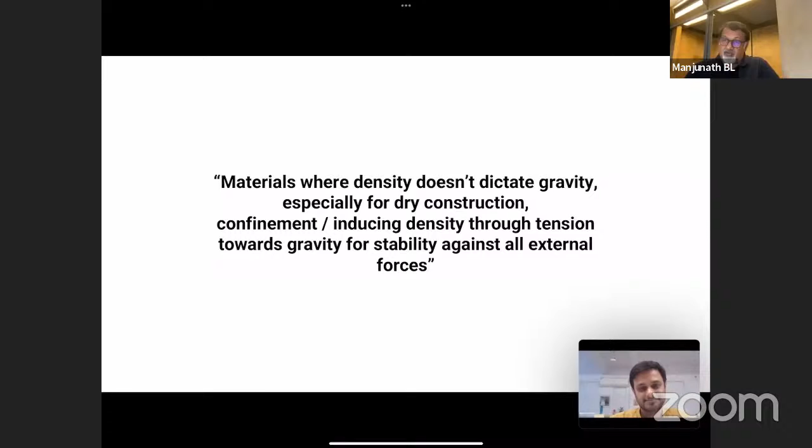So I just skip this, and go to this very overall picture. This is very interesting to me. I think what I start looking at, in a way, when I am at my scale, I can see objects, but when I go beyond my scale, I see two lines which are very provoking to me, very scary to me.

Is the horizontal line between the earth and the sky - that is where we are, right? And then there is a very scary line, the vertical line, which is between the water and the land. Just look at people - they're not bothered what is below the water. Imagine for a moment, on the edge of the land, if you just imagine there is no water, you're on top of the mountain. Immediately you're on top of the mountain.

Similarly, on the horizontal surface, you are at a great level of influence of external forces onto the ground. Either the wind wants to take over the ground, or the ground has to intrude and take away the sky, the space. Similarly between the water and the land.

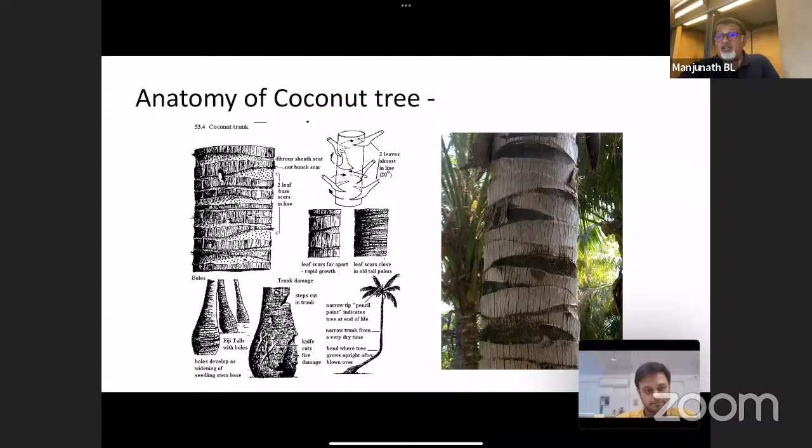So go back to the next, my very interesting interest in nature is a coconut tree. This existence is between the land and water. The first wind will come and hit the coconut tree. So what is this coconut tree made up of? If you observe the coconut tree, the way it sheds the leaf, the surface, the texture of the surface, as you can see. And if you look at the cross section of the coconut tree, you look at the coconut, you have porous material in the center and very hard strata on the periphery.

You look at this, and to me, this is a fantastic example of concentric springs. This is nothing but how I perceive this, I see this as a spring. If you look at this image, I look at this as concentric springs, which are seamless, and every moment it is strutted by a compression member so that it doesn't come back. So it is pre-stressed and confined. And you look at the cross section of it, it looks like a star. It's fantastic. All these struts are nothing but triangular formations which strut the spring and keep it so rigid.

And still so flexible. So that's why I tell most engineers, luckily this tree is not designed by an engineer. If this were to be designed by an engineer, I think there would be no existence of any coconut tree, because this tree has the ability to flex and come back. It doesn't hold this force. It allows the force to relieve itself and then come back, because of the effect of the spring.

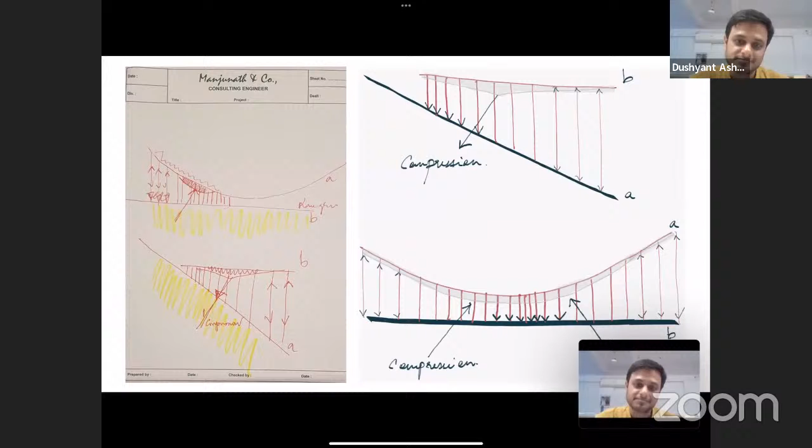Kailash temple is one, and the second thing is this in Jaipur — you have this Hawa Mahal. I was just talking to an architect, Flying Elephant Rajesh. We were just talking about how one shape, one size of different scales has put together to create an environment which is totally different, magical.

Each element of different shapes are put together. The inspiration came from carving, because everything is very thin, but the scales are different—one small, one big, one higher—and people move within that, to experience the movement of wind, which is fantastic.

How do people get this idea, and why are people not getting this idea? It's a question, basically.

So do you want to also build up from other things that you have for us today to show, because I think there might be other interesting things which open up from this.

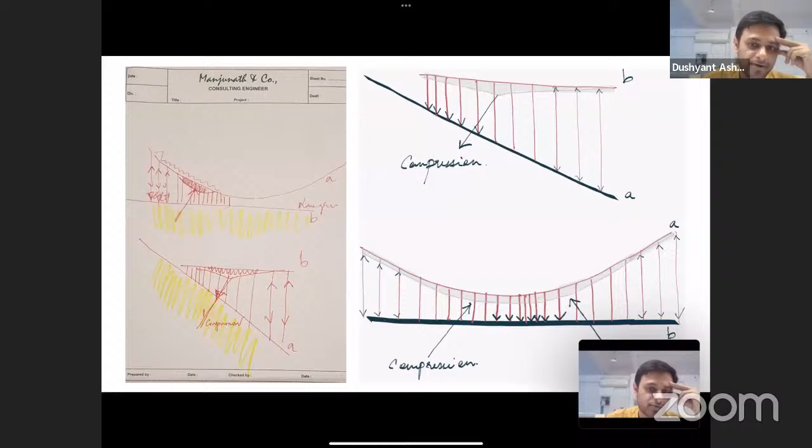Yeah, I see. I'll just show you something very simple. I think I want to show, through this experience, this understanding of the environment where we belong, and to understand this sensitivity.

How do you create buildings? If you are given the chance to create a building, how do you build buildings?

So this is a very interesting project which we did in Coonoor, like a building on a hill. How do people walk on a hill? When you walk on a hill, you put your first leg in compression, whereas the second leg will be in tension—basically, it balances you.

What does that whole act do to the body? The body becomes stiff. There's a twist because of this movement, so your shoulder becomes very twisted. This becomes very strong. Keeping that principle, I created this building.

It's a concept—just in the sense that it's a concept of why we can't do this building. So I'll show you some images of this.

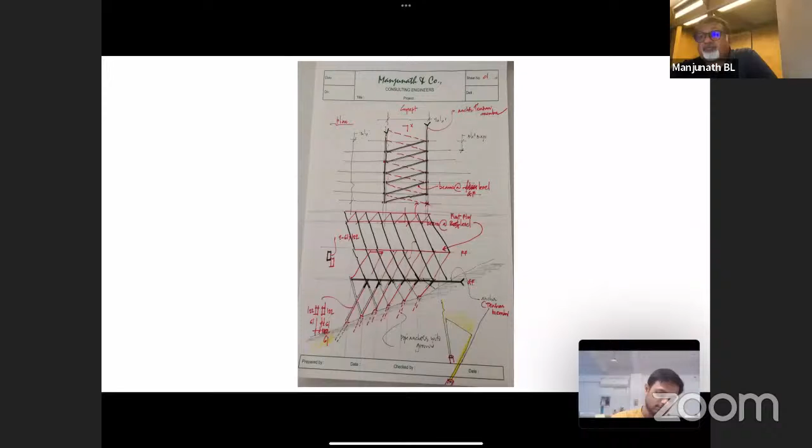So look at this building. This is done with minimum material—steel, which is fragmented to an extent that you can hold this material in your hand, and combine it to your requirement, according to your understanding of the force, and then you don't weld it, you bolt it.

Everything is prefab, built somewhere and erected somewhere. So this looks as temporary as an insect—I think this is going to stay for one hour. After that it is not there. So that quality of temporariness is very important in a built form, where you should allow sunlight to come to the ground, even to touch the ants below. That is the sensitivity at which we have to start looking at any built form on this earth.

So this is the structure. This is about 10 years old, going strong, still looks so temporary. But it is married to that environment—it doesn't want to go now. It's there to stay.

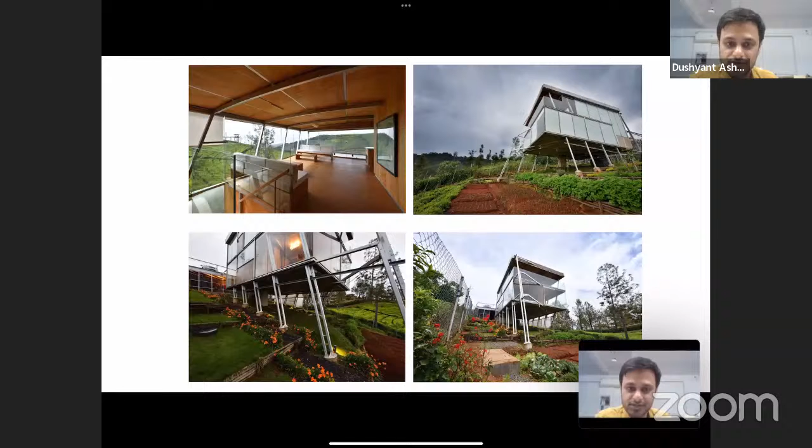On the other hand, there's a project I remember, maybe it's in the slides, we could also see the stone project, the house. I think it's a house with stone, I'll show it to you and take you through a few examples on the same language.

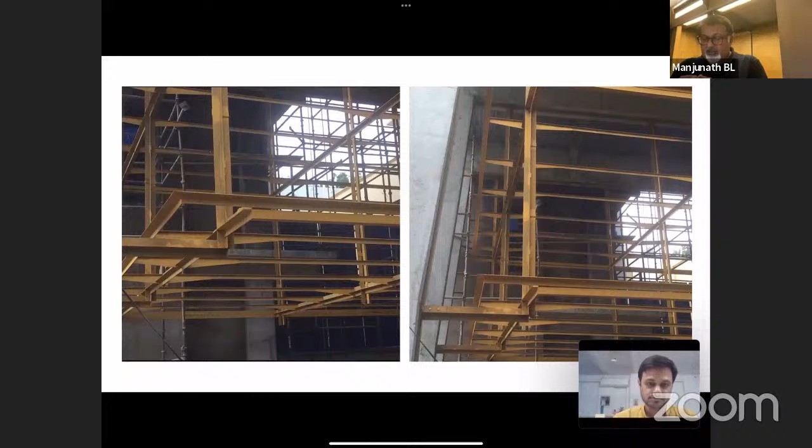This is very interesting to me, how you try to use a simple bent material. You take a flat section, and keeping it aligned for a long distance is very difficult because the flat can twist. So how do you make it more rigid? You bend it by 90 degrees, and it becomes an angle. The beauty of an angle is it can be a channel, or a back-to-back angle, or a box with 4 angles, or an I-section with 4 angles, with 2 angles on top and a plate.

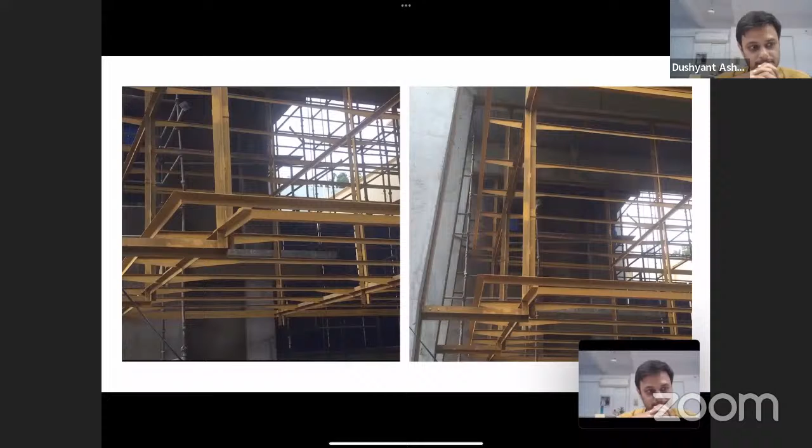When you're able to fragment with such a simple material, how do you choose, having understood the behavior of the structure, to suit your own need? What is wrong in it? You don't need education for that. Education is only to absorb the essence, and use that essence to create.

This whole building is an architect's office, where we created 2 floors of suspension and 2 floors of steel structure on a core which is a monolith sitting on the ground. The monolith is not 1 column, it is 2 columns, so a car can be parked below. The idea is very simple, not complicated, not complex at all. How do you fragment a single support into 2 elements where the car can be parked, and how can you suspend it?

Most nests are basically suspended structures, right? All done by fibers or grass. It's all grass, so it has the ability to take tension.

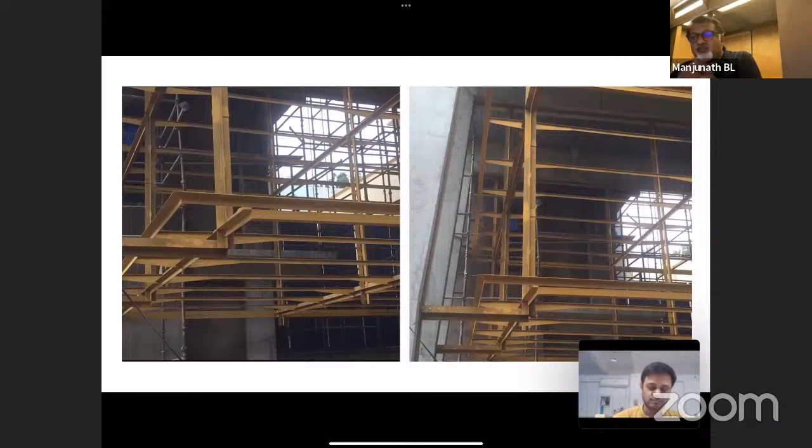So what we created was this simple light structure. When you look at it, it's just fragmented stiffness, and below you can park the car with no obstruction at all. When you look at this structure, you can feel the force, you can feel tension. There is a lot of transfer of energy, and zero redundancy in this building. Why can't we create buildings with zero redundancy? It gives you the feel of a human being - you have a spinal cord, a spine, ribs, and it's all suspended.

Two angles become a plus column, which is stiffer in both directions, and gets concealed when doing the wall system. It just gives an indication that you put the wall and the steel is fused in between, or the steel is well within - that's what I'm talking about. You choose a section which seamlessly occupies the space of invisibility, it doesn't show, there's nothing to show.

This is one of my very favorite projects. You see this lightness - in the first photo, you can see it's a cage which is suspended, holding 200 kgs per square meter at two levels, two live loads.

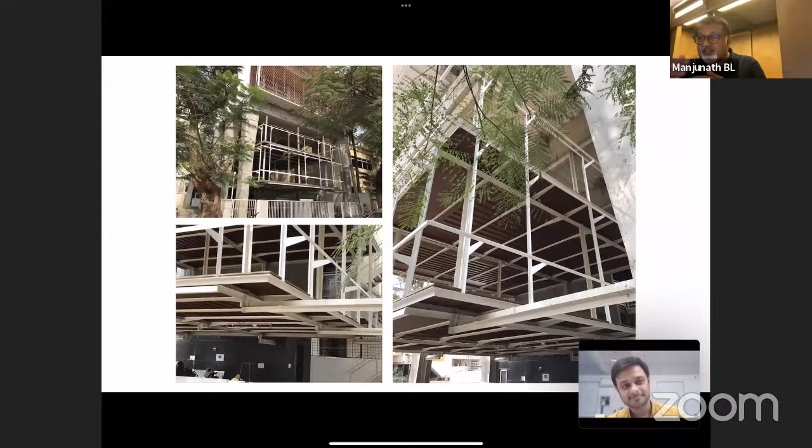So, this is another relation that you made with the monolith and this sort of very fine thin layer of steel which comes around. But I think what's more important is the experience of it, because you don't see the massiveness or the expected visible sense of the structure. But at the same time, it is kind of holding mass while becoming invisible by itself. So I think that's an interesting relationship where you start from thinking of structures as invisible, or that seamless shift from invisibility to making a structure, at the same time it becoming invisible in relationship to an existing material like the core or the concrete mass that is there. So that builds an interesting dialogue between two materials, one which is cast and the other which is assembled together.

And also thinking of these two processes, one coming from a composite sense of being, like you're actually making the bone of the body, the way the bone grows, and the other is where these finer cages emerge. But at the same time, it completely shifts from here to the monolith that you actually have. I would ask you to go through this before we enter there.

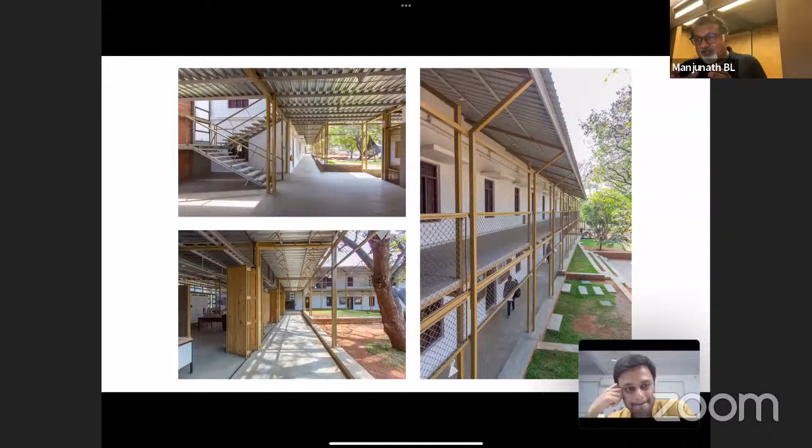If you look at some of the images, how these columns enter and terminate, and how it allows the other person to come and stand on it or perform music or poetry. It gives you a sense of playing - it's not about regimentalizing, it's about play, just relieving yourself to the form of the roof.

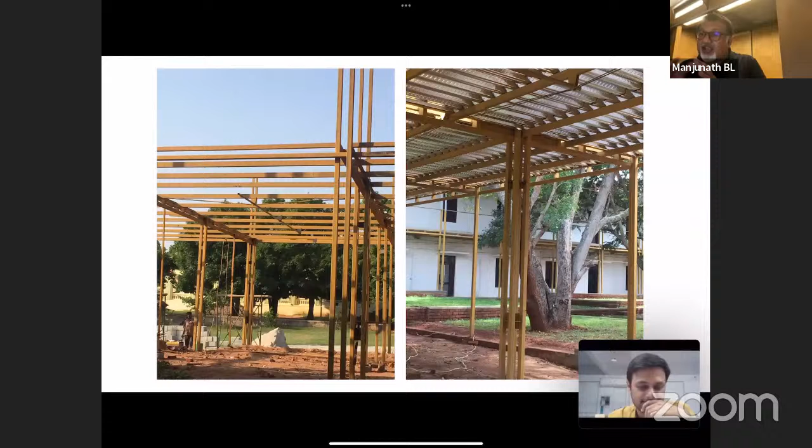So you look at this, each member is going side by side, not interfering, no welding, just managing to be there up to a certain point - they enjoy their association at a given point of time, do that activity, and then go beyond, they're not bothered. So small elements of their belonging.

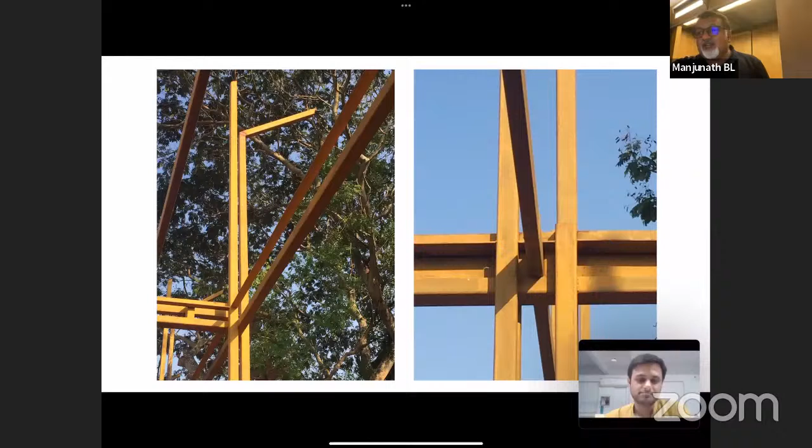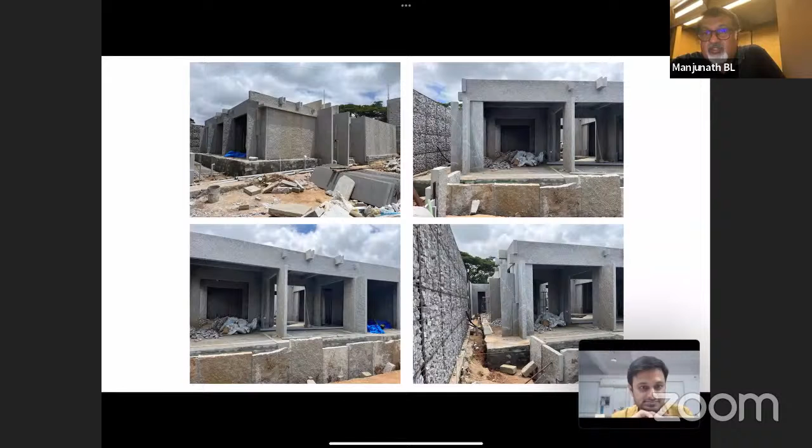I didn't take the whole thing, see, you see this actually. You can see the inside of the wall, these fins, finally converging as a plus in the center. So these are nothing but nine squares, which make the house. The center one is a courtyard, and it is a standard format.

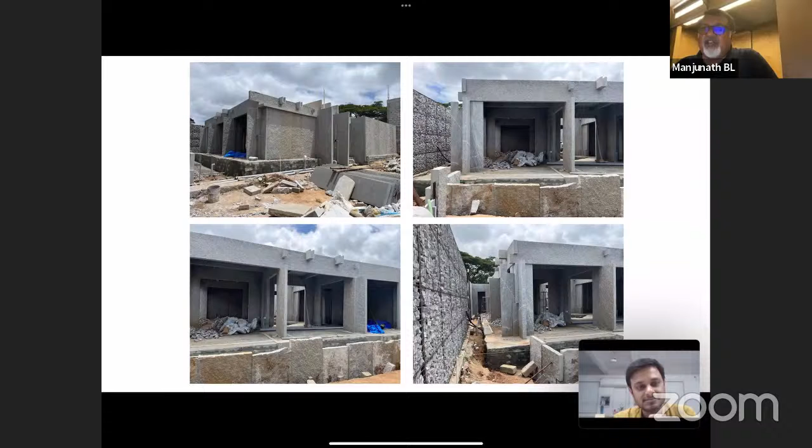Every joint, you must look at this joint. You see this? Everything has a seat, it gets locked. It's very simple, but what is very important? What is very important is the visual element is very similar to RCC.

This is the Sadarahalli stone, right? Yeah, this is Sadarahalli stone, it's a granite. And I think also what you were speaking of the redundancies before, I think this is a quite interesting example to look at.